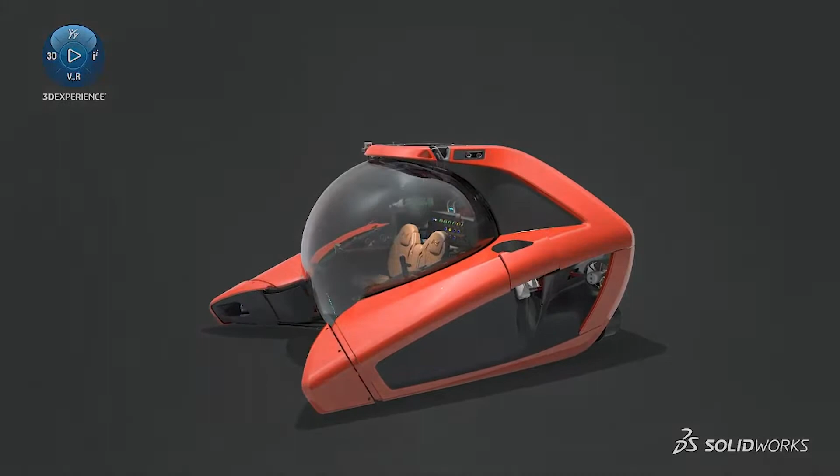At a high level, let's take a look at SOLIDWORKS 2022, on the surface and in a deeper dive. The high-level themes for SOLIDWORKS 2022 are Work Smarter, Work Faster, Work Together.

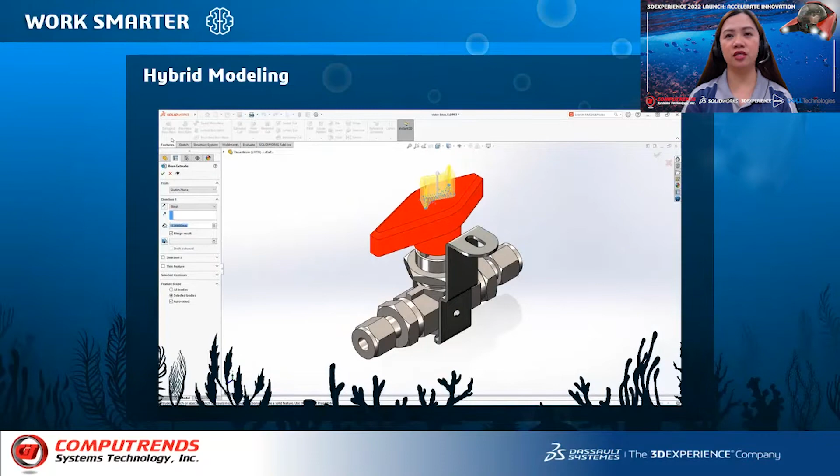Let's start with Work Smarter. We have hybrid modeling, which combines the advantages of mesh data with the accuracy of parametric features to streamline your part design.

Configuration table: generate integrated tables based on existing variations to generate and manage configurations.

Component patterns: pattern-driven placement of assembly components generates seed and instances more intelligently.

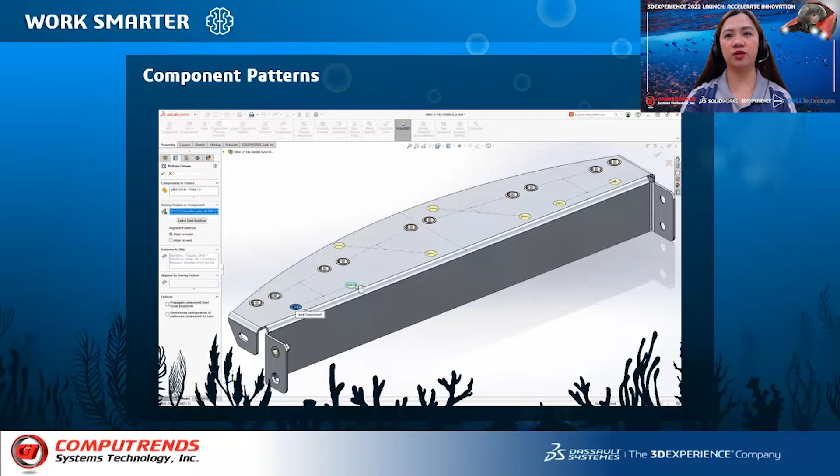Geometric Tolerance UI: a redesigned GD&T experience lets you work faster and more intuitively to define your most complex requirements.

Stud Wizard: generate external threads, including new cosmetic graphics and callout annotation.

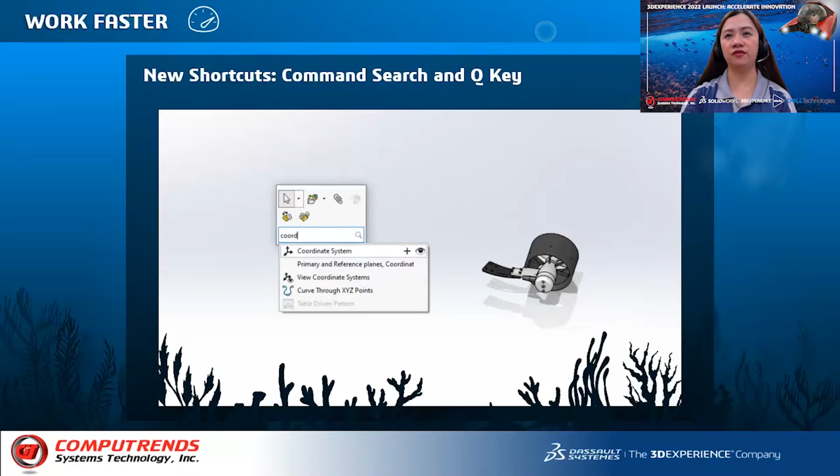Work faster: new shortcuts, Command Search and the Q key. Search is integrated into the S-key shortcut menu, and Q reveals component reference geometry on demand.

Open Detailing Mode Drawing from LDR: jump from an LDR assembly to the associated drawing in detailing mode without resolving any components.

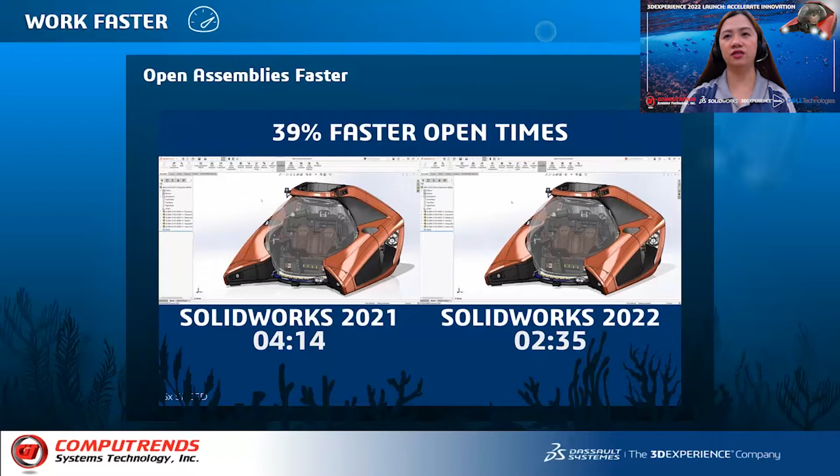Open assemblies faster: dramatically improve performance when opening, closing, and saving, including fully resolved and LDR sub-assemblies.

Quick Mate Toolbar: fast and simple way to build your assemblies and make final adjustments to assembly constraints.

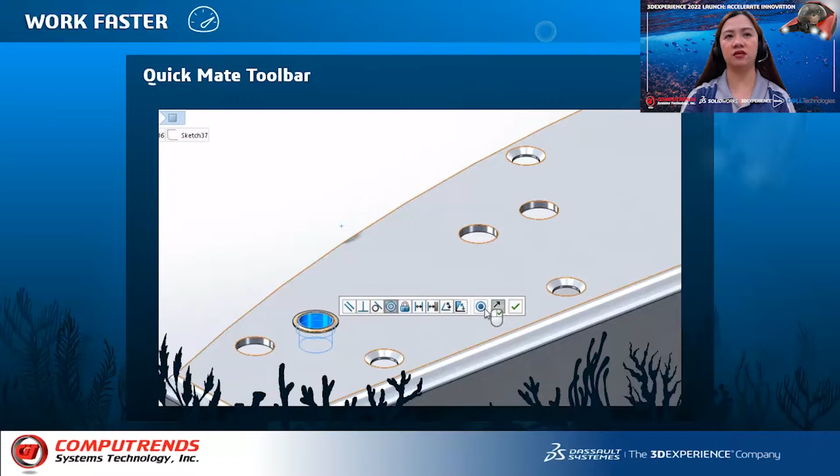Expanded use of detailing mode: add new standard views and hole tables, and open any drawing in detailing mode, regardless of when it was last saved.

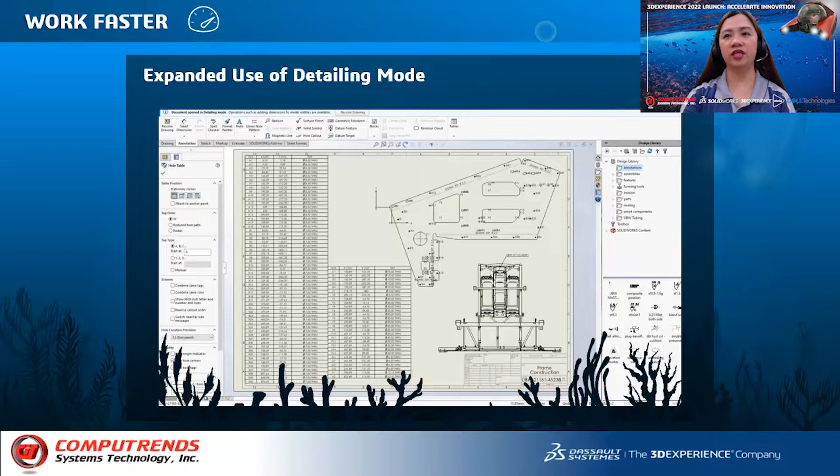Work together: new administrative image types and options. New types allow you to deploy SOLIDWORKS installations remotely, and new options allow for long-awaited client installation.

Now let's see what's in SOLIDWORKS 2022, deeper dive. We have user experience, hybrid modeling, structure systems, assembly performance, assembly features, drawings, import, graphics, and administration.

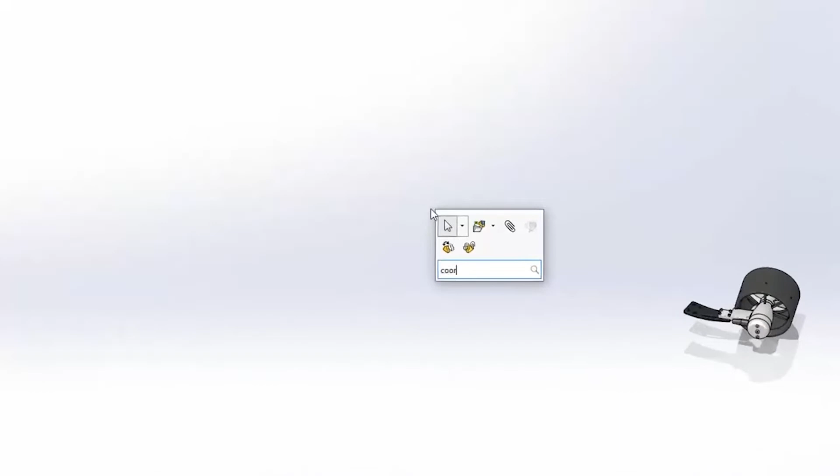User experience: SOLIDWORKS 2022 helps you be more productive with thoughtful user experience enhancements. Command Search is now integrated into the S-key shortcut menu.

You can even have SOLIDWORKS show you its location for future reference. The position and orientation of the thrusters has been precisely calculated, so mating to a coordinate system would be a good strategy. In 2022, coordinate systems can be defined using specific numeric values, making placement of the second thruster a snap.

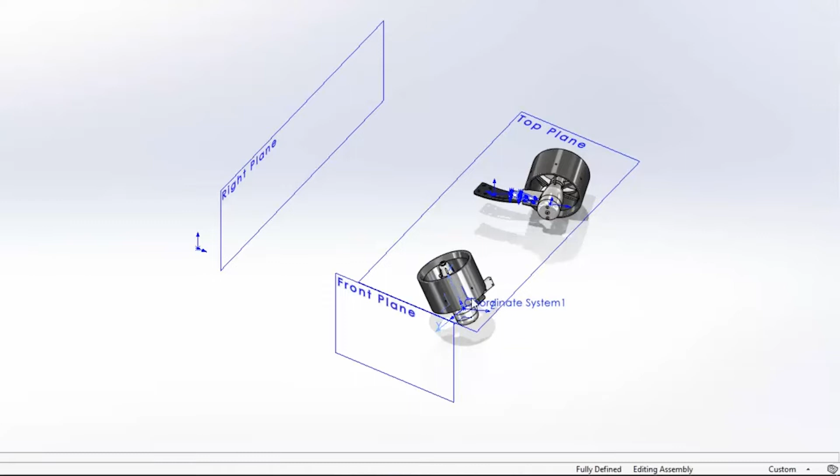Origin visibility is currently turned off to reduce clutter on screen. With 2022, the new Q key keyboard shortcut allows you to quickly turn on assembly or component reference geometry such as planes, coordinate systems, and origins. Coordinate systems have visually and functionally changed as well.

Their axes, planes, and even the point itself can be used to create sketches, section views, and more. These thrusters need to be mirrored. Commonly used tools like these are conveniently added to the shortcut bar with one click, and the new Q key shortcut works even while creating features.

These bubbles appear throughout the system options and give you more insight into the setting. Dismiss messages have always been easy to show again but were sometimes truncated. Now, hovering over an item reveals the whole message, making it easy to determine if you'd like to show it again. Notification pop-ups, like this reminder to save, have been unified in style and appearance.

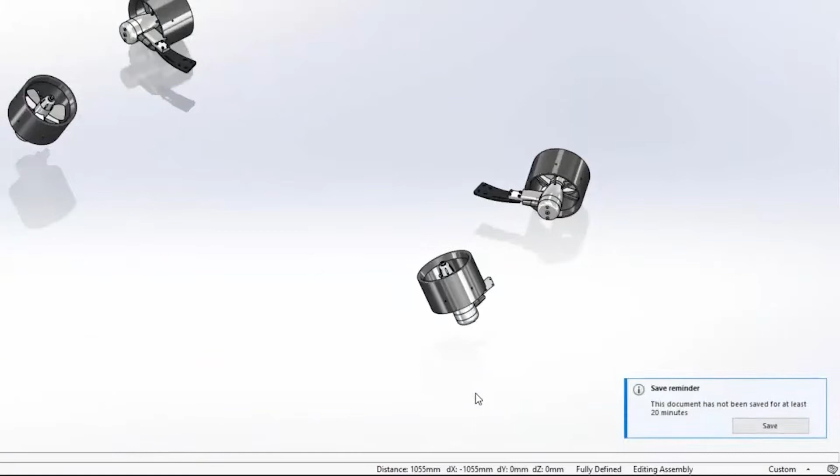When you need to collect a project and all reference components, there's no better tool than Pack and Go. In 2022, you now see a progress bar giving you an indication of how long the process will take, which is especially useful for larger assemblies.

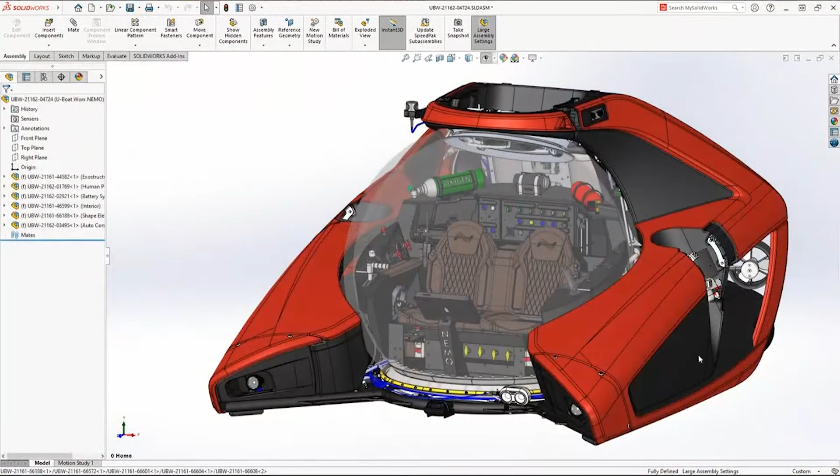The most user-friendly 3D CAD software in the world is now even easier to use with these valuable additions to the user experience: access every command from the S key shortcut menu, and position and orientation can now be defined numerically.

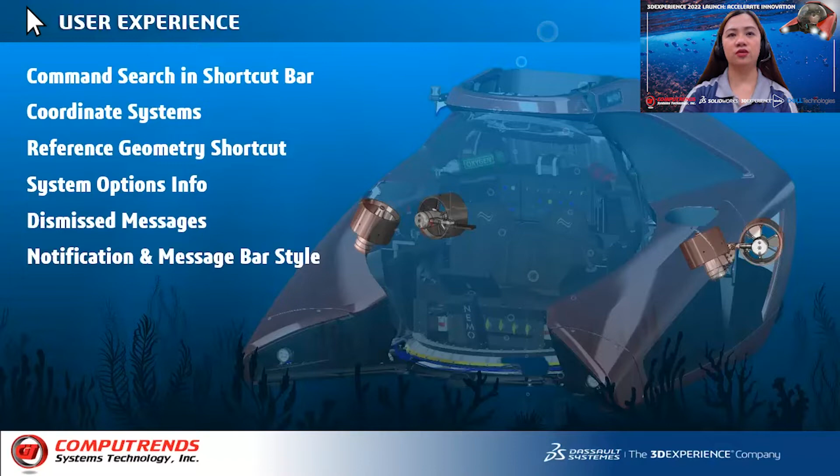The Q key shows planes, origins, and coordinate systems. Get more information when you hover over the eye bubble icon, and read the full truncated message. Notification style has been unified, and new informative message bars are introduced, so you'll no longer wonder if Pack and Go is processing or stalled.

Hybrid modeling: designers demand the ability to create manufacturable products using an ever-increasing variety of file formats.

SOLIDWORKS 2022 makes this easier than ever with new enhancements for Mesh BREP formats and tools that help you view and edit critical product information. This ball valve equipped with the lockout tagout feature is perfect for this control panel, but the handle is too plain to be incorporated in a luxury product like the Nemo.

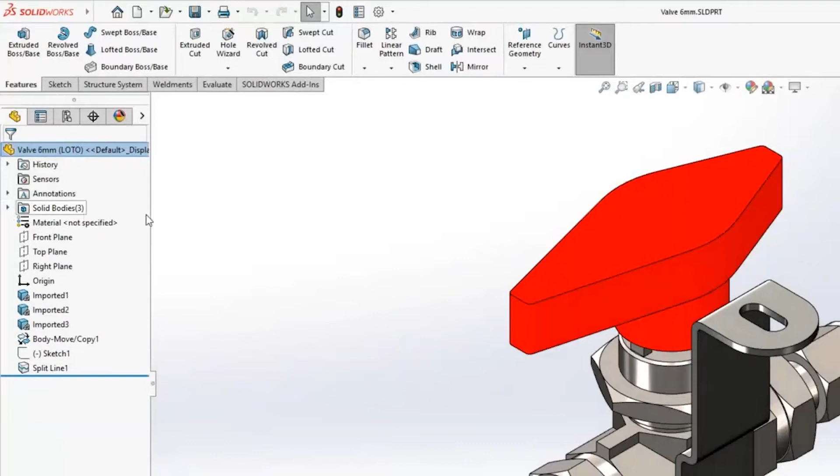The supplier provided their files in Mesh BREP format. In SOLIDWORKS 2022, working with these files is just like working with native geometry, thanks to the new hybrid modeling capabilities. The handle needs a slot for a lock.

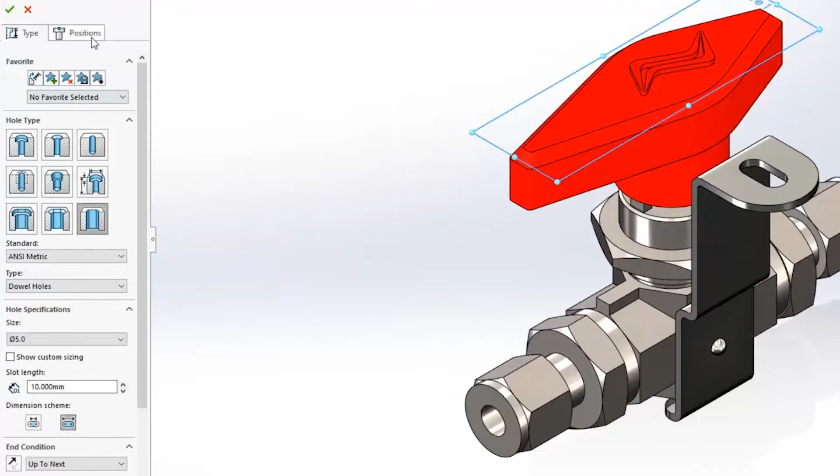Now in 2022, Hole Wizard's slot length can be defined by arc tangent or centers. Also, when positioning the slot, the tab key toggles between vertical and horizontal orientation.

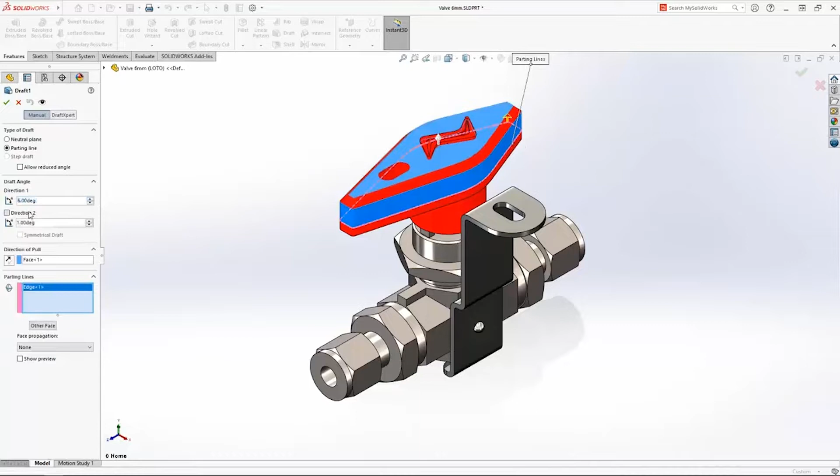Manufacturing this handle will require draft. Bidirectional parting line draft would be the most appealing. In SOLIDWORKS 2022, you can now create draft in both directions when using a parting line rather than having to create two separate draft features.

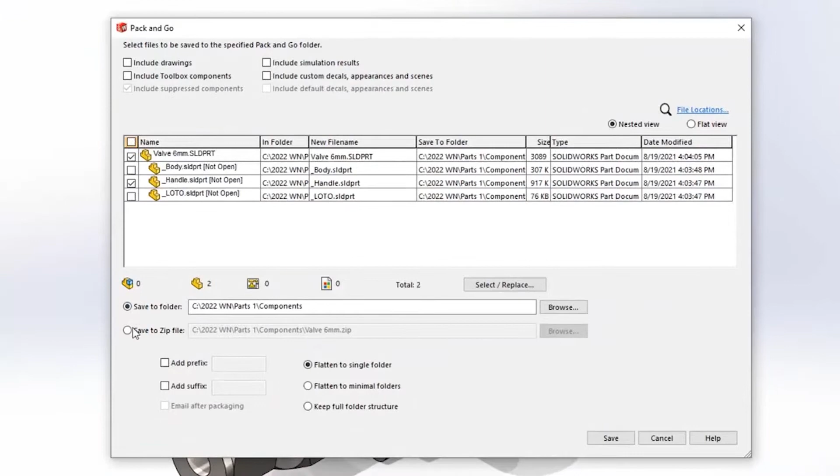This mesh file contains three bodies, but the manufacturer needs access to the individual components. Now in SOLIDWORKS 2022, Pack and Go recognizes the references created when using the save bodies and split part commands. This way, you can choose which files you need without having to find them manually in Windows Explorer.

Section views are a great way to inspect components, but sometimes a suitable plane doesn't exist. Now, you can specify a section view from any cylindrical face, conical face, or axis.

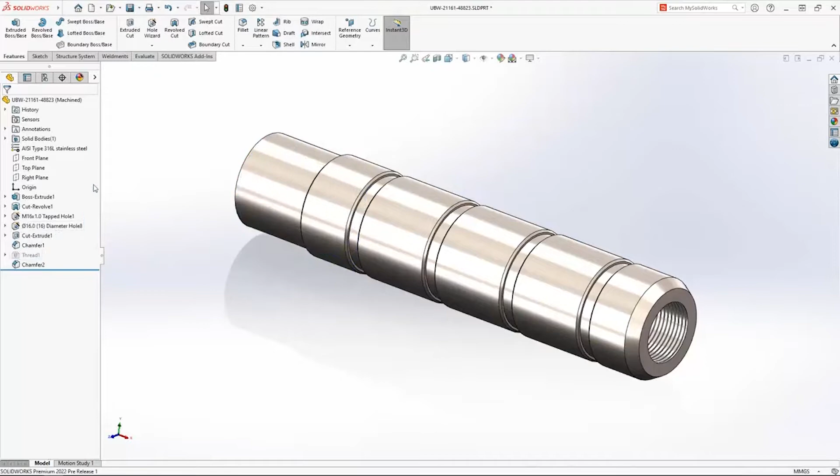These 16mm cut threads are useful for rapid prototyping. The new Stud Wizard is a great choice here as it automatically recognizes the diameter of the boss but still provides a list of different thread sizes and pitches to use. You can even create an undercut with full control over the dimensions.

In SOLIDWORKS 2022, configuration-specific properties have been separated into two tabs: Configuration Properties and Property Summary. In the first tab, property information is added. Now you can choose which configuration they applied to using the drop-down. The Property Summary tab provides a useful way to compare configurations based on a custom property.

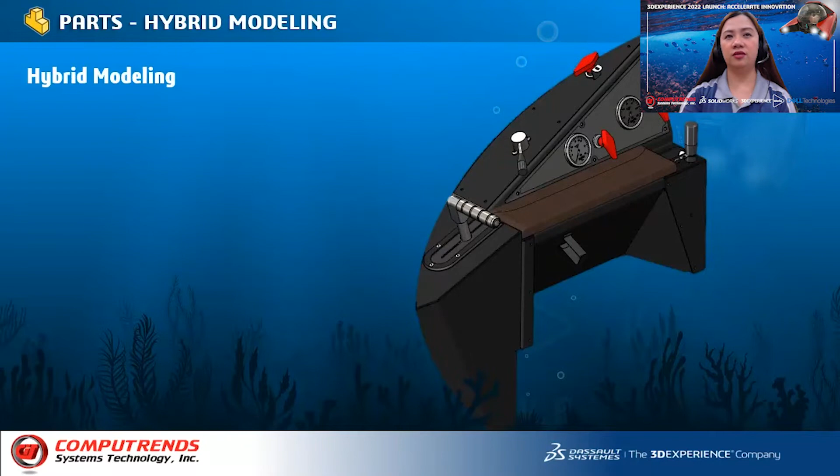Designers sometimes have no choice of the files they receive from a supplier, but still need to support the design through to several different manufacturing methods. SOLIDWORKS 2022 provides the tools you need to get the job done fast and efficiently while providing improved visibility to critical product information. Directly edit Mesh BREP bodies just like you would a native SOLIDWORKS part.

Slot length can now be defined using arc centers or arc tangents. The tab key toggles orientation. Add draft in two directions when using a parting line. Pack and Go now recognizes the resultant bodies from the split part and save bodies commands. Easily section about an axis. Create a stud from an existing cylindrical boss or make one on the fly. It's easier than ever to add and edit properties.

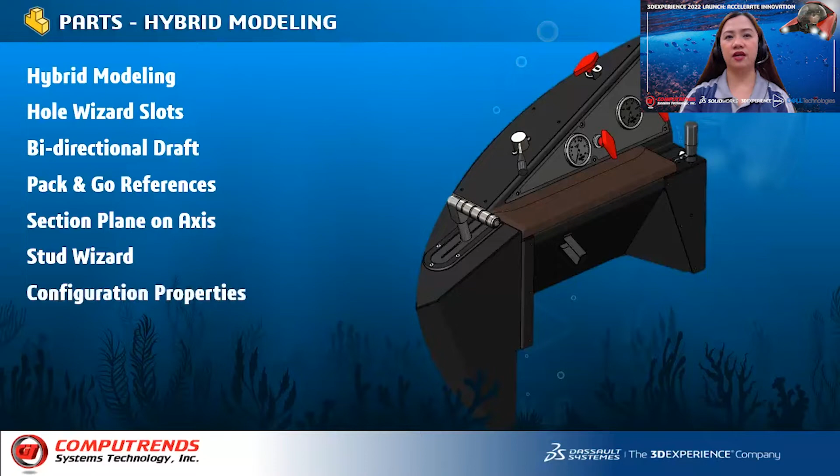Structure systems. 2022 is no exception, with enhancements to secondary members, the introduction of connection elements, and more. This vertical post will be carrying a heavy compressive and bending load, so it will need extra support.

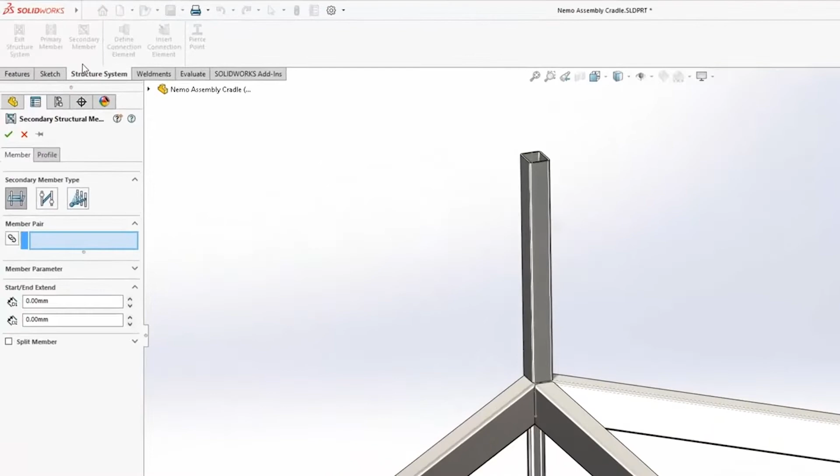Creating multiple secondary members is fast in SOLIDWORKS 2022, now that you can select a point and multiple bodies. Corner treatments are just as intuitive to define as they have been in the past, giving you full control over the end result. Also new to SOLIDWORKS this year is the ability to define or insert connection elements.

This leg requires a base plate so the cradle can be attached to the floor. Just select the member and the plate is automatically centered at the end.

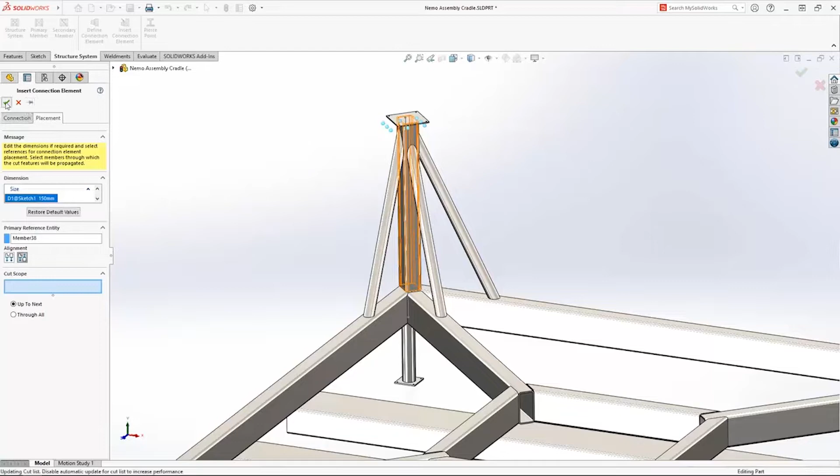These forklift lifting channels may need to be replaced if damaged, so a connection element is perfect for this situation. Simply select the faces of the members, then use the convenient member planes, which reveal themselves automatically, to center the element. Gussets and end caps are also now supported for structural members in SOLIDWORKS 2022.

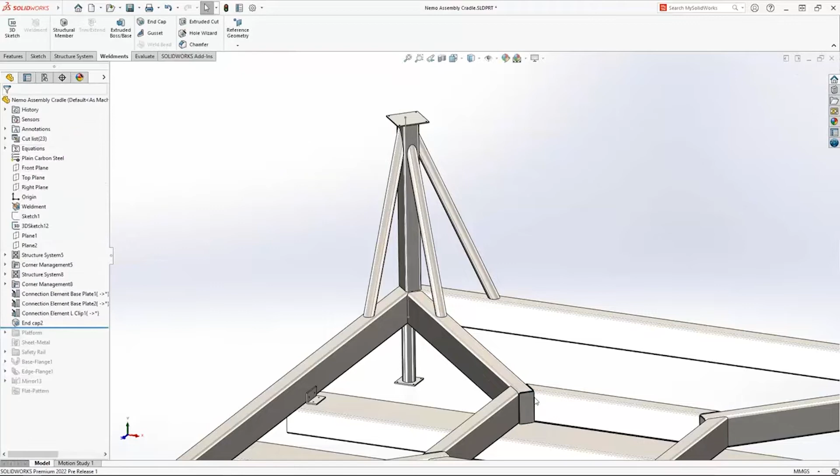Mirroring features and components is a very commonly used function. In SOLIDWORKS 2022, you can mirror across two planes or faces. No longer will operations like this require two separate mirror features.

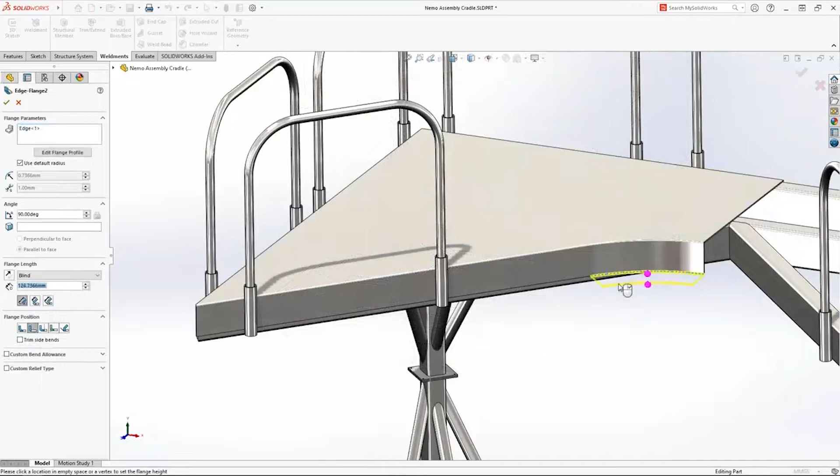SOLIDWORKS introduced the ability to create an edge flange on the circular edge of a non-planar base in 2021. This has been improved to allow you to edit the flange profile directly inside the property manager so that you can specify the exact flange length you want. Structure Systems is a powerful but flexible tool.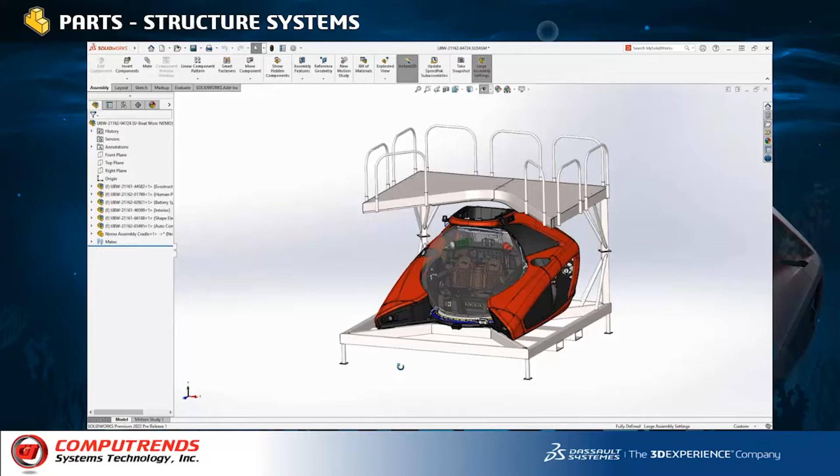With these new enhancements to secondary members, connection elements, mirroring, and sheet metal, creating frames and structures is easier than ever. Quickly create multiple secondary structural members from a point, and define and insert components used to bolt members together.

No longer just for weldments, mirroring is now supported in structural members, reducing the number of mirror features in your part. You can also edit profiles for flanges created with the circular edge of a non-planar base.

Assembly performance: SOLIDWORKS 2022 offers faster ways to access your design from the start. Large Design Review Mode, introduced in a previous release, provides a lightning fast way to open your large assemblies with very few limitations. The large and complex 6031 component Nemo submersible from U-Boat Works opens in merely 13 seconds, allowing you to get to work faster.

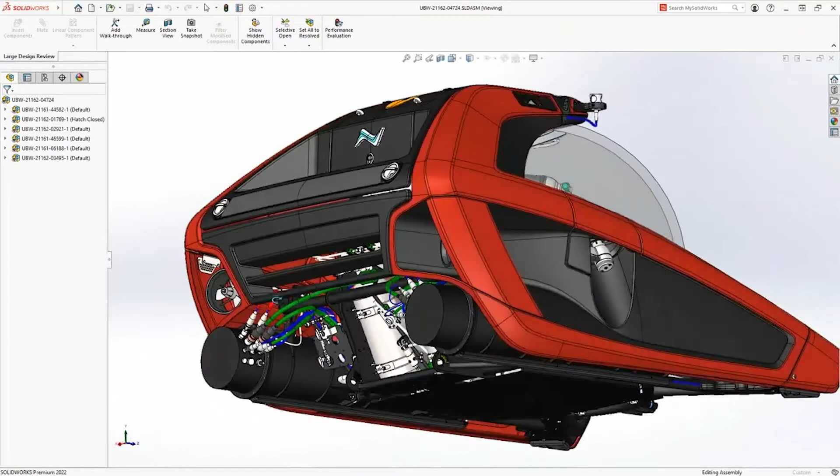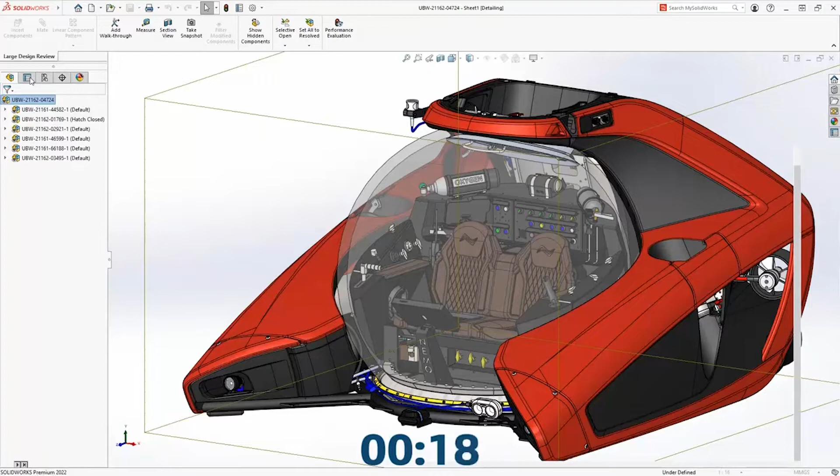New for 2022 is the ability to easily open drawings from a large design review assembly in detailing mode from the right mouse menu. Detailing mode is an extremely efficient way to both open and work on your existing drawing documents. Like opening the large assembly of the Nemo, the drawing is opened rather quickly as well, in only 18 seconds. Detailing mode is a fully interactive way to work with large drawings that have already had their views created.

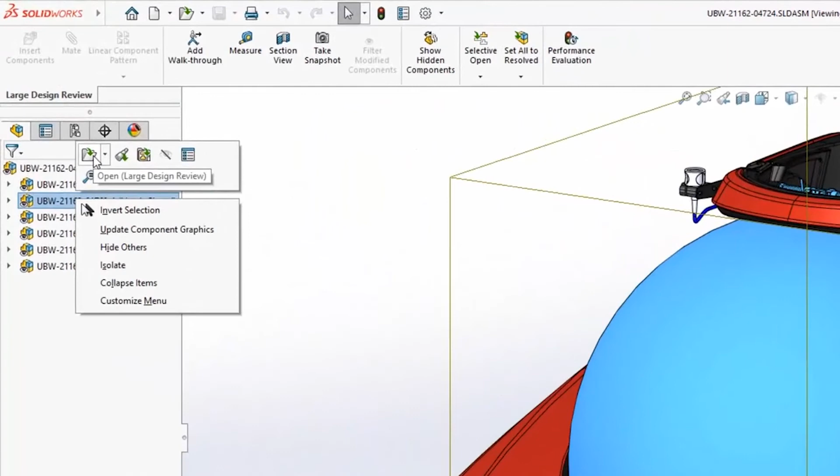In this environment, you can continue detailing your design, adding dimensions, notes, tables, and more. The ability to quickly access drawings from large design review mode will streamline how you work with large complex designs. Additionally, in 2022, you can open sub-assemblies from large design review mode in this lightweight format as well.

This ensures that you're not loading any unnecessary information that's not currently needed. Whenever you want access to the fully resolved models, you can choose to open them from the same right mouse menu. Assemblies can now be opened fully resolved faster than previous releases. When working with large design review mode, you can now open the corresponding drawing in detailing mode and any sub-assemblies in LDR.

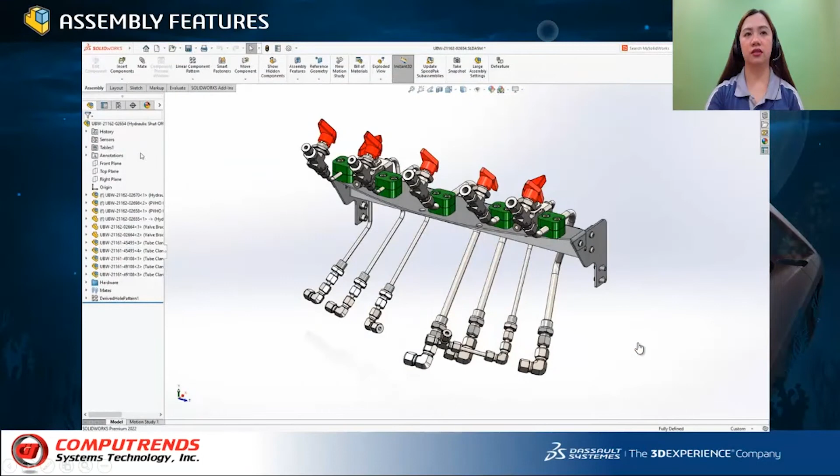Assembly features: you can always resolve an assembly that is already open in large design review mode.

Moving components is now easier in SOLIDWORKS 2022. When selected from the Feature Manager tree, you're now presented with a triad that makes it extremely simple to get a component into just the correct spot, with controls for X, Y, Z, and rotation all at your fingertips.

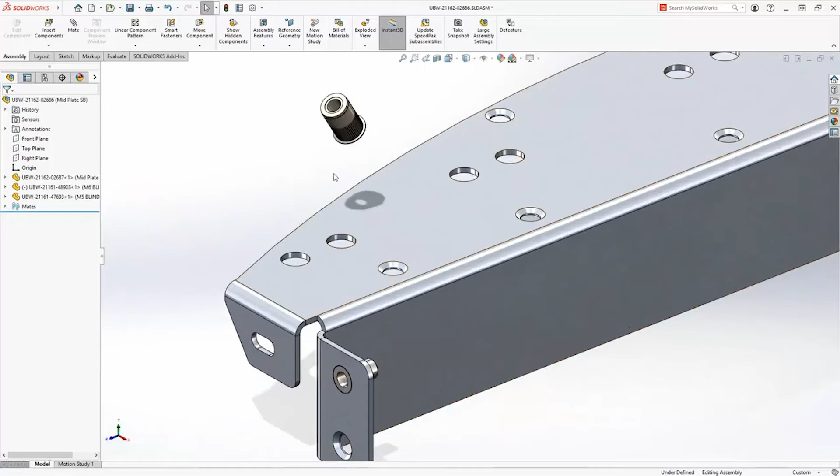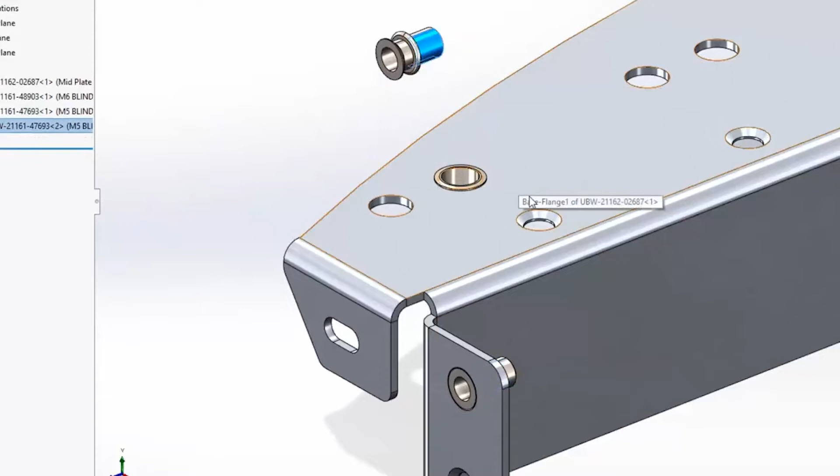The Quick Mates toolbar in 2022 also gives you more control by presenting you with the option to make adjustments before adding a mate, such as the alignment. This is also true when adding circular type mates, where you will be given the opportunity to lock the rotation of them before confirming. This new ability to add extra control while mating with the Quick Mates toolbar makes it fast and simple to quickly build your assemblies.

The intelligent pattern-driven component patterns get even smarter in SOLIDWORKS 2022. When you choose a component to pattern, SOLIDWORKS will always choose that component's location as the seed for determining how to create and position the other instances.

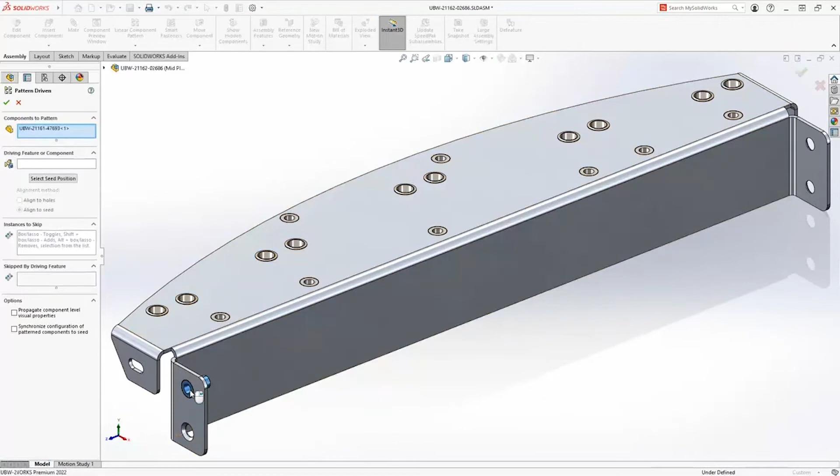Even if you change the location of the component to a different location, the pattern still assumes that the component you are patterning is in the seed position. This means it's much easier to take advantage of the existing patterns and hole wizard features to quickly position multiple instances of components such as hardware and rapidly populate your assemblies.

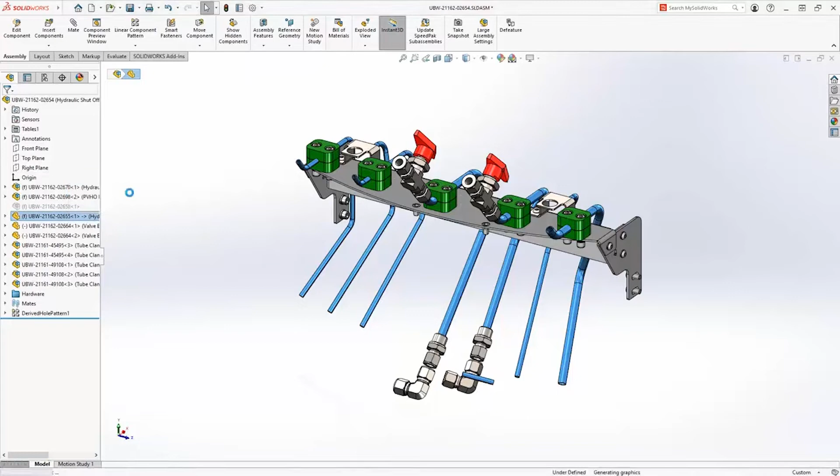Configurations are a powerful way to create alternate versions of parts and assemblies all within a single document. You can choose to have instances of components included or excluded from different versions of the design. You can also choose to use alternate configurations of other components in each configuration. These possibilities are endless. New for SOLIDWORKS 2022 is the new configuration table.

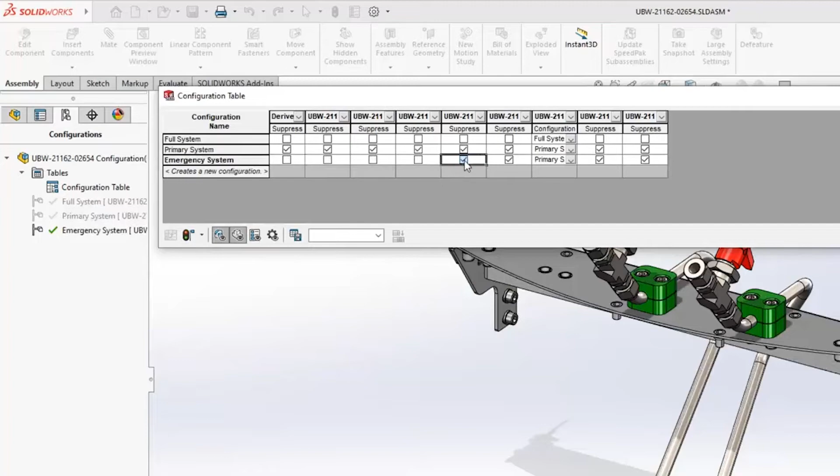This table makes it much easier to both create and manage configurations. From the table, you can add new versions to your design, and you can also choose to toggle the suppression state of different components on and off. You can specify which version of components to use in each configuration.

The controls make it easy to see your changes as you're working as well. If you make changes to the configuration manually, such as suppressing components that weren't included before, they will be added to the table as well.

The configuration table also has filters to make it easier to focus on what's important. You may want to ensure that the custom properties for each configuration are unique to each new version of the assembly.

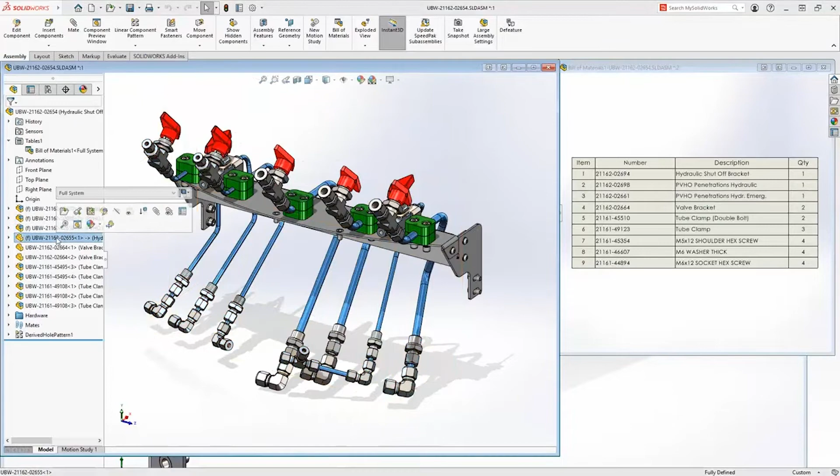When looking at the bill of materials, there will be cases when components in the design should not be included. This option can be controlled from the component properties in the assembly to specify this. However, this can become time-consuming for parts that regularly should not be included.

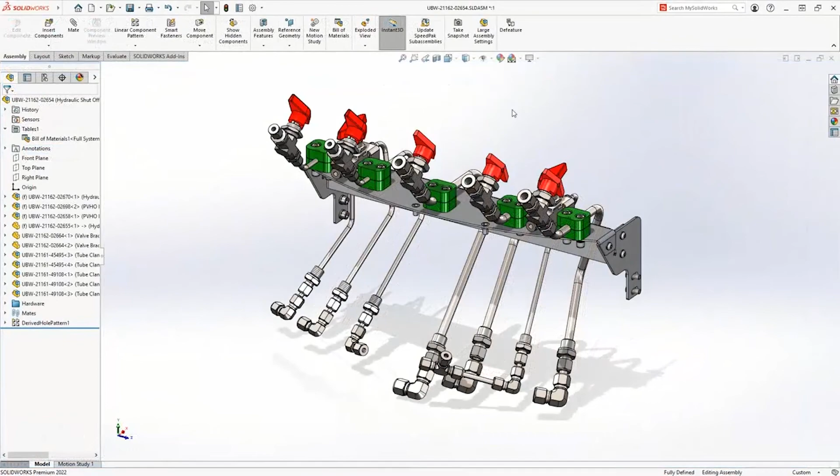New for SOLIDWORKS 2022 is a configuration option at the component level where you can specify that a component should have this option enabled by default, saving you the time from having to change this each time the component is used. SOLIDWORKS 2022 introduces a wide variety of performance and usability improvements to ensure that you can focus on the engineering of your designs and less time determining how to manipulate them.

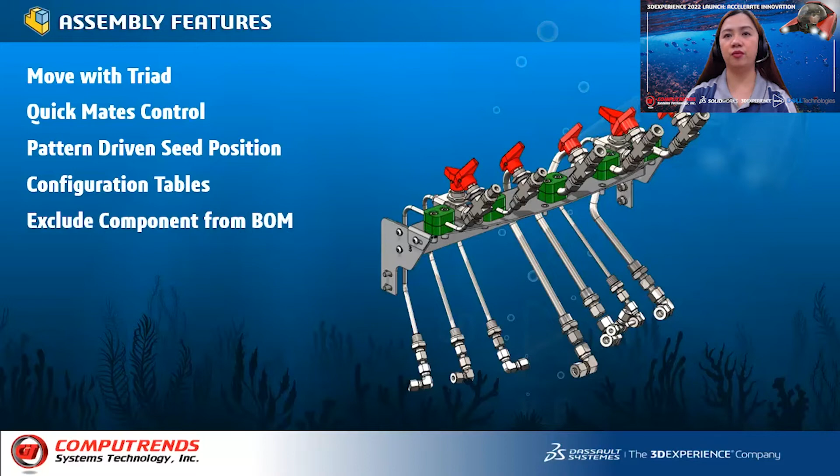Selecting a component now presents a triad for easier movement in the graphics area. Quick Mates now gives the option to flip alignment and lock rotation before finishing. It automatically determines the seed instance of a pattern-driven pattern. There's a new native table type for creating and managing configurations that does not require Microsoft Excel, and a new configuration setting that specifies if a component should be excluded from the bill of materials by default.

Drawings. Companies like UBoltWorks need to build it right the first time. That means clearly communicating through SOLIDWORKS drawings. And sometimes these files get huge.

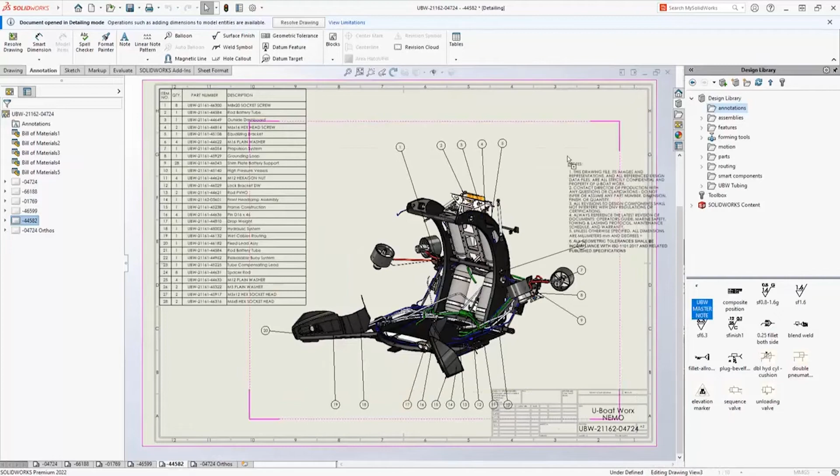You can open even your largest prints in just seconds and work on them without the overhead of loading any parts or assemblies, or even having them on your machine. Add and edit notes, snap in a missing balloon, organize sheets, add dimensions, set tolerances.

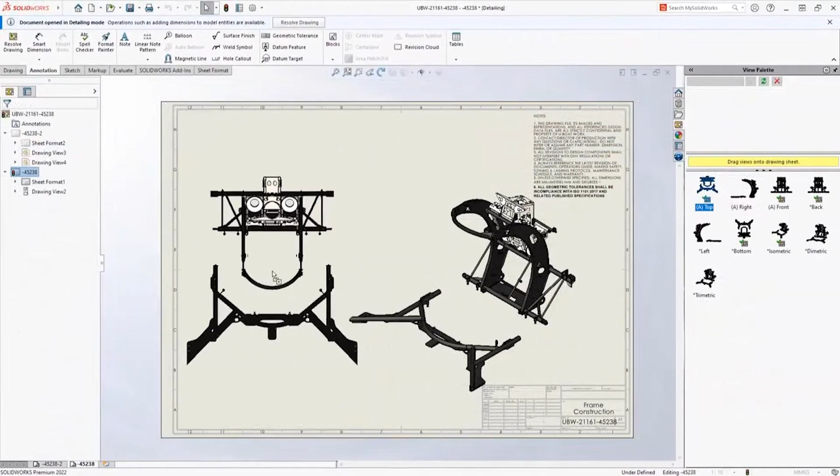New in 2022, you can insert whole tables and standard views from the view palette. When you're done, you can save, even print in a completely accurate PDF.

What about older drawings that haven't been accessed in years? In 2022, SOLIDWORKS has extended the ability to open any prior version drawing right to detailing mode.

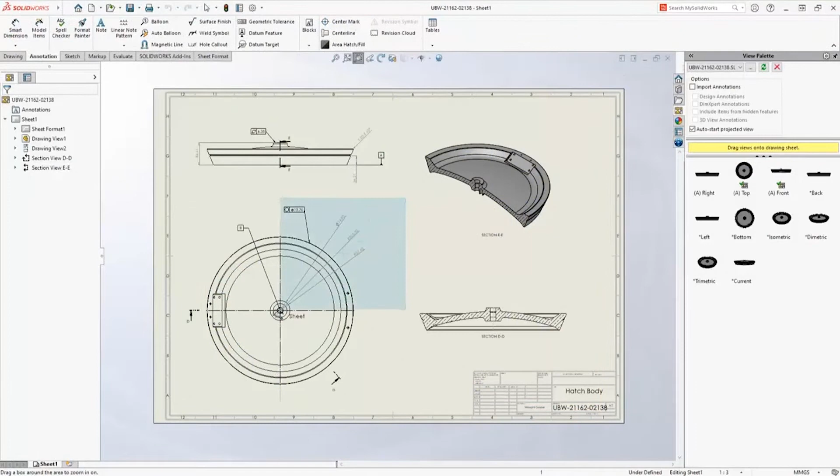So what else is new with drawings? How about a new in-context menu? This pop-up lets you toggle a circular dimension, diameter, radius, or linear.

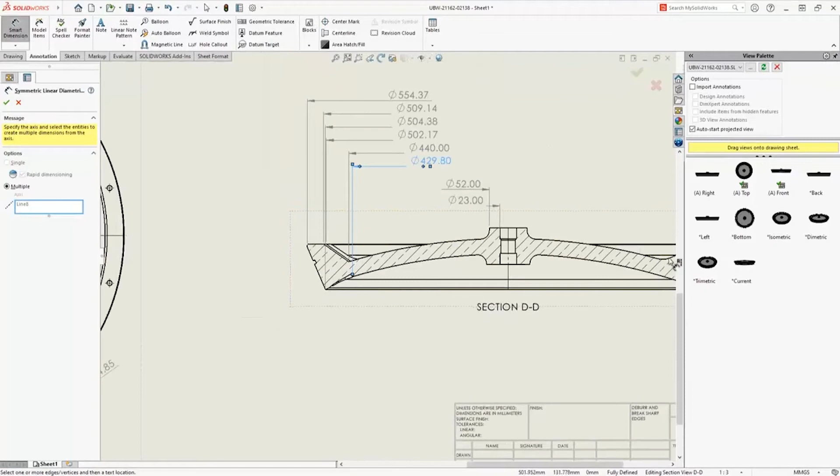For turn parts, the new symmetric linear diameter dimension will come in handy. These are double dimensions which can apply in a single click to a silhouette edge or in batch with multiple axis mode. This new annotation type allows for a clean section view by eliminating redundant leader lines.

Geometric dimensioning and tolerancing allows functional definition of component features and allowances, so it can clearly illustrate manufacturing intent. SOLIDWORKS 2022 introduces a brand new interface to define geometric tolerance indicators.

In a design like this, I have many unique weldment parts, each with its own cut list. This is rich data. With SOLIDWORKS 2022, the detailed cut list option is available for bill of materials of all types. This means you can aggregate multiple cut lists into an assembly BOM.

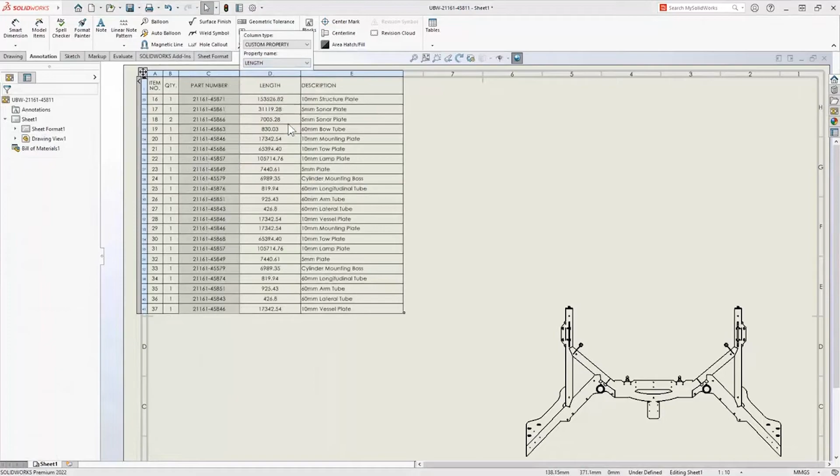New in 2022, the flat pattern view is available, and there's a new option to toggle bend lines visibility, increasing your ability to automate documentation of sheet metal parts.

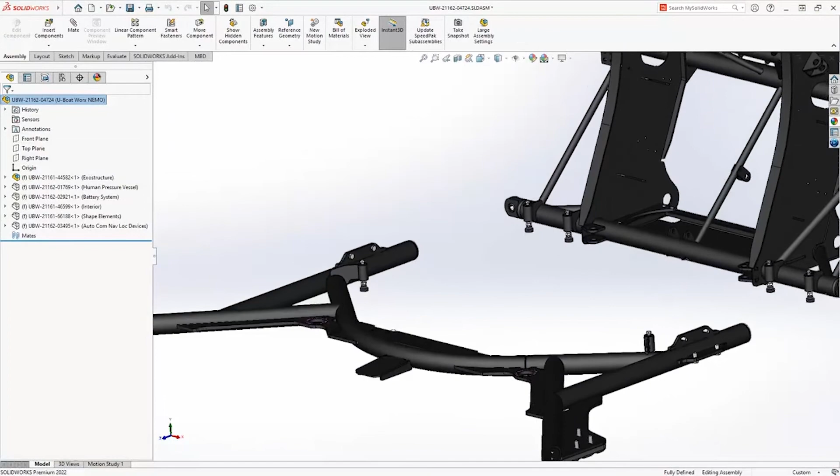Proper documentation is a key component of bringing your designs to life. Add clarity to your drawings, share your content, and finish this task faster with SOLIDWORKS 2022.

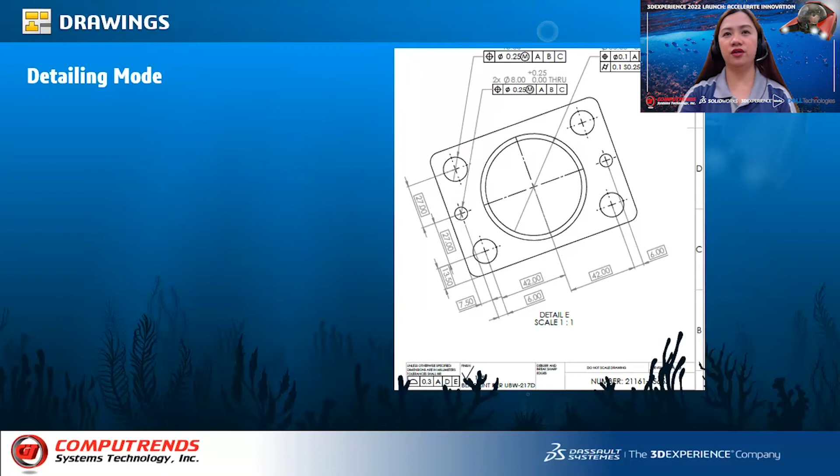Add standard views, hole tables, and work faster by opening any year's drawings too. Flip between radius, diameter, linear within context. Use the tab key to choose before you place. The new dimension type gives cleaner views of complex turn part diameters.

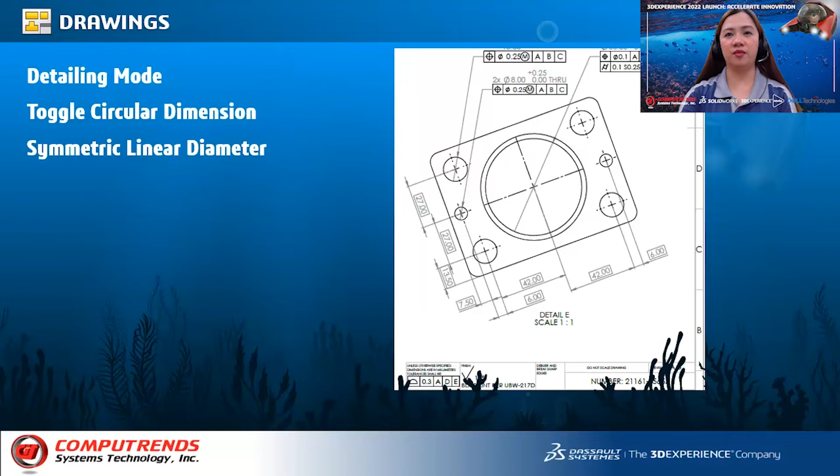A brand new, easier to use toolset to document GD&T indicators in the latest industry standards. Flexibility to promote and show weldments cut list in any type of assembly bill of materials. Automate creation of sheet metal flat pattern and trimetric or dimetric views.

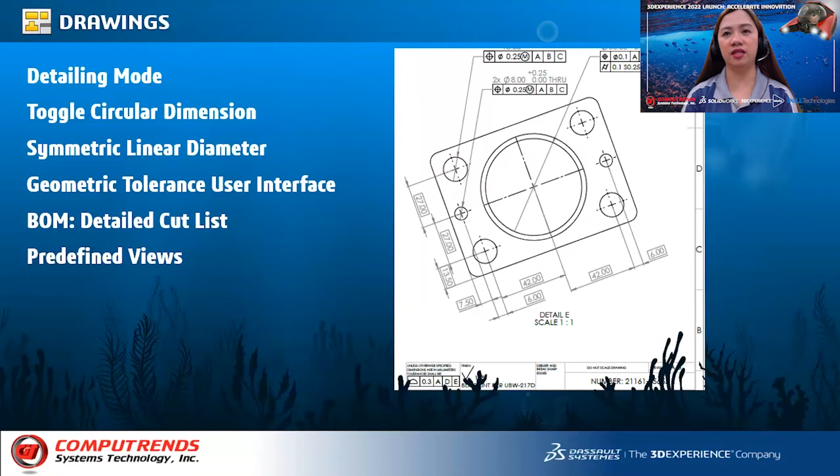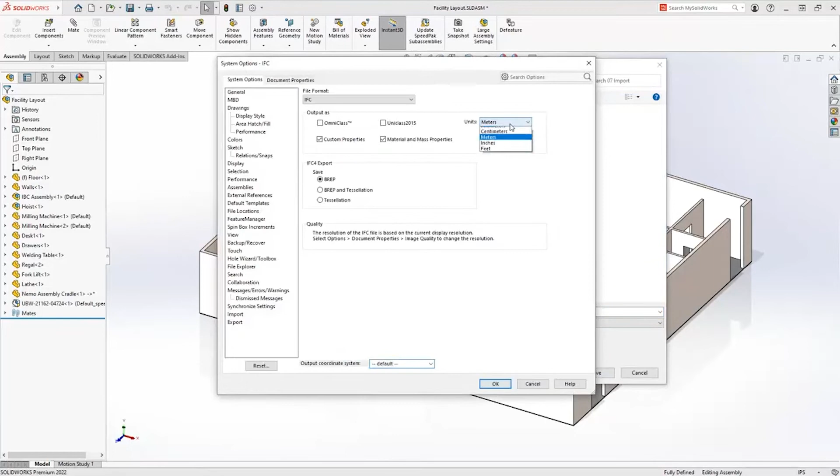Import. When collaborating with others performing design work focused on facilities, often you need to share your design data using alternate file formats like IFC. SOLIDWORKS 2022 has focused on improving both the efficiency and reliability of saving IFC file formats out for other design tools to leverage. Additionally, 2022 has improved its flexibility when reading IFC files as well.

Now, when you open an IFC file, you can choose to filter specific object types to import, avoiding the need to open unnecessary geometry, and focus on just the information you need to work with. All of this means the imported files both open faster but also do not contain overly complex geometry for the specific design task you need to perform when working with IFC data.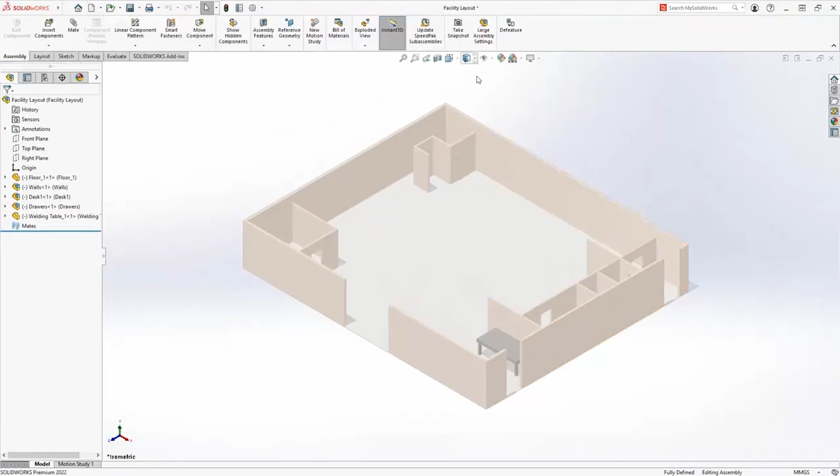Also new for SOLIDWORKS 2022 is the ability to better support the export of the DXF and DWG file formats from part files.

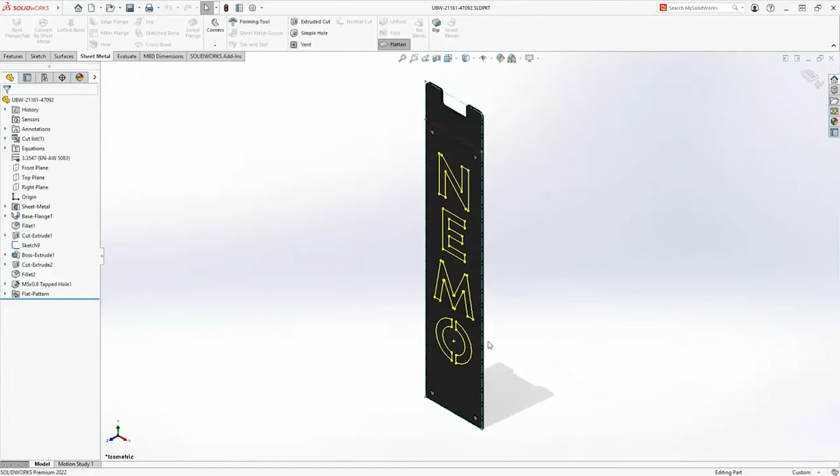Components often contain color information that is important for manufacturing processes, such as the color of sketches, bend lines, and other information. This is extremely valuable for downstream operations where colors can represent different manufacturing processes or parameters for NC tool equipment. SOLIDWORKS 2022 has improved the way you can collaborate with others by improving the overall import and export experience to various file formats.

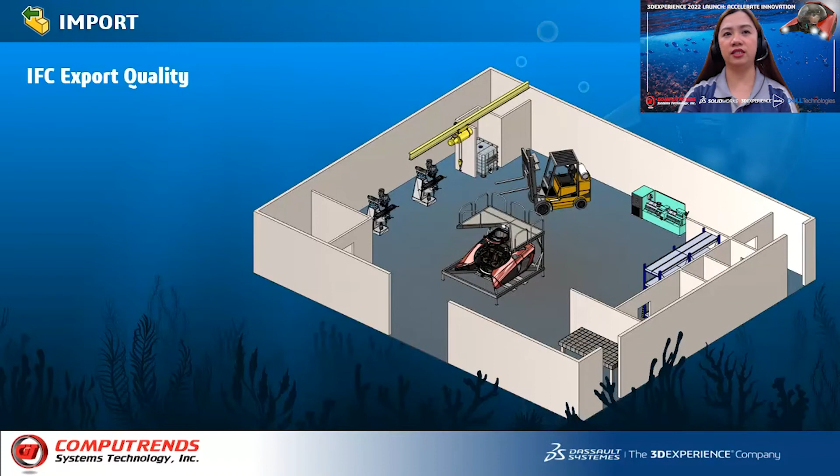IFC files exported from SOLIDWORKS have higher quality. You can now filter and choose which objects to import with IFC files. Support colors for DXF or DWG files created from part files. Import thousands of surfaces or solid bodies without long delays.

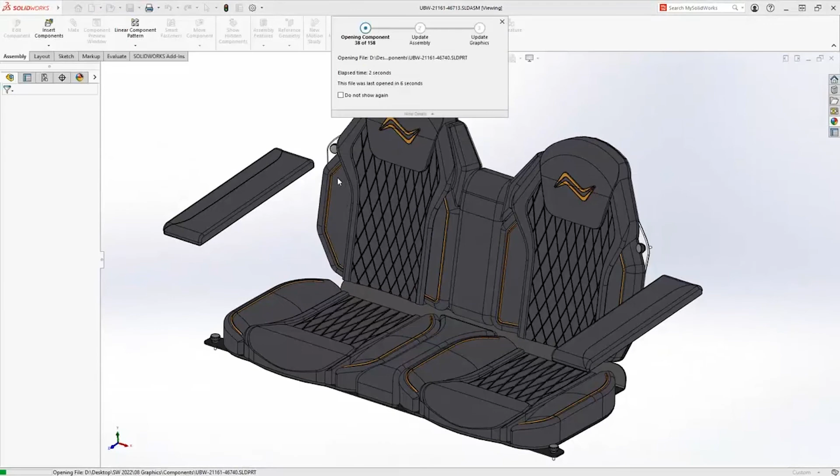Graphics. Cosmetic and appearance changes happen regularly throughout the design process. Understanding and updating these changes should happen regardless of when or how you open your files. SOLIDWORKS 2022 now automatically resolves lightweight components that have had graphical or appearance changes, regardless of whether any features have changed since the components were last saved. This ensures that your components will always appear correctly.

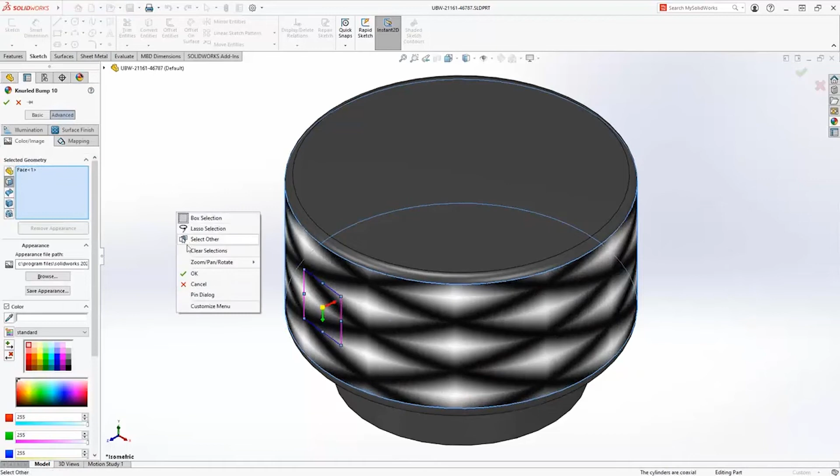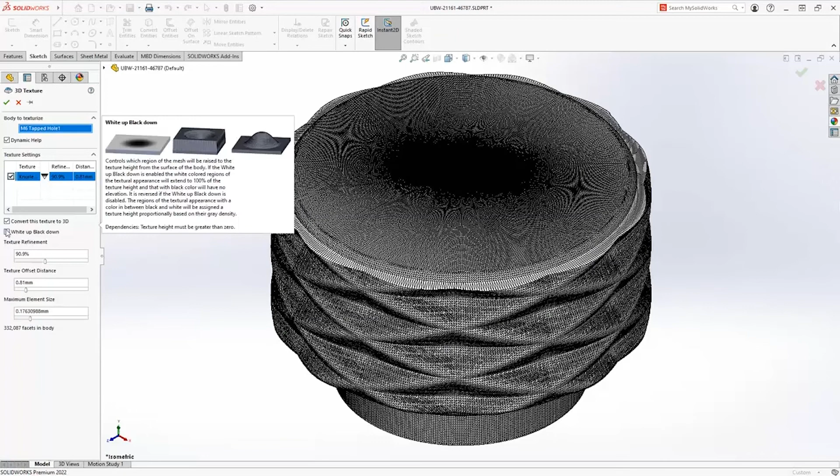SOLIDWORKS introduced a unique and simplified way to incorporate complex textures within your design in a previous release. By leveraging unique appearances on faces, bodies, or components, textures can be created on these surfaces to generate complex geometry quickly. SOLIDWORKS 2022 delivers increased performance and responsiveness when creating these oftentimes complex and highly detailed textures, meaning you can use them in more places without sacrificing performance.

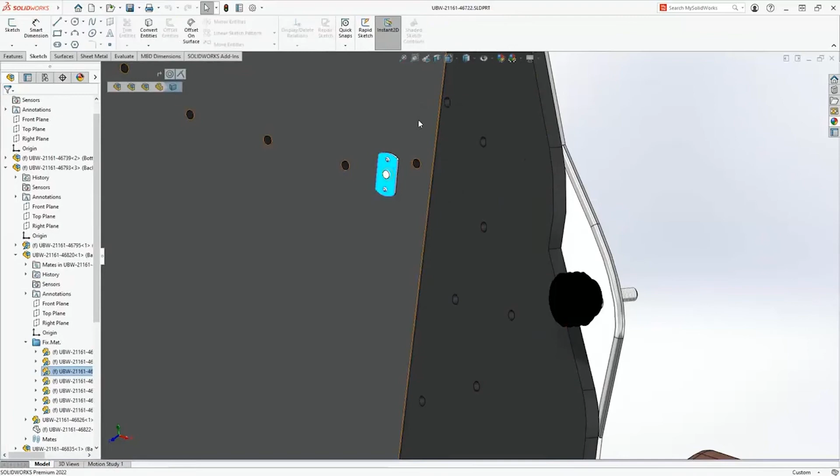Another graphical change in SOLIDWORKS 2022 is the introduction of texture-based cosmetic threads. These new cosmetic threads, beyond looking great, make it much clearer to understand which components have threads on them. These threads will be used for any type of feature that includes cosmetic threads as well, from manually created threads to the newly added stud feature and of course the hole wizard.

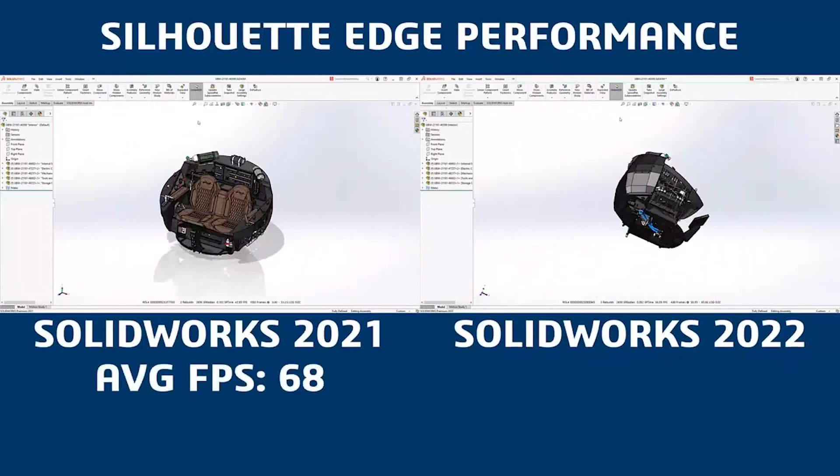Finally, performance is always critical to saving you time. SOLIDWORKS 2022 has increased the frame rate when rotating parts and assemblies with silhouette edges by over 10%, saving you time with every single zoom, pan, and rotate.

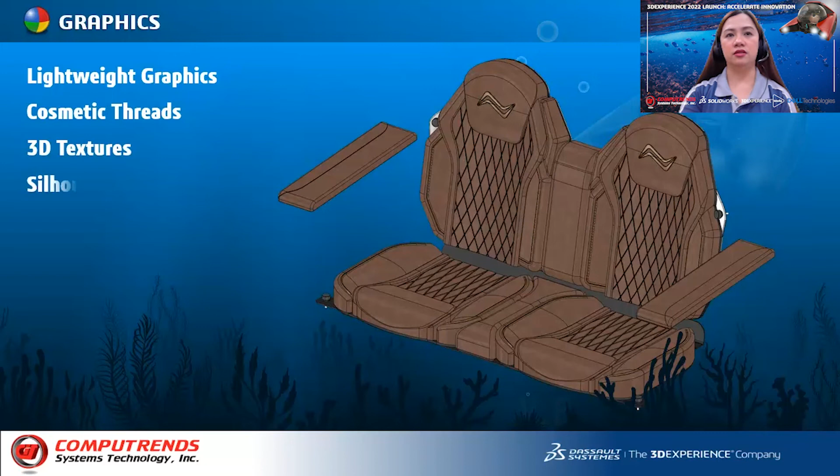Correct graphics and textures are shown for components that are loaded lightweight. Graphics have been completely redesigned for clarity and performance. Faster and more refined with better detail. No longer CPU dependent, increasing overall FPS by 40% when working with assemblies.

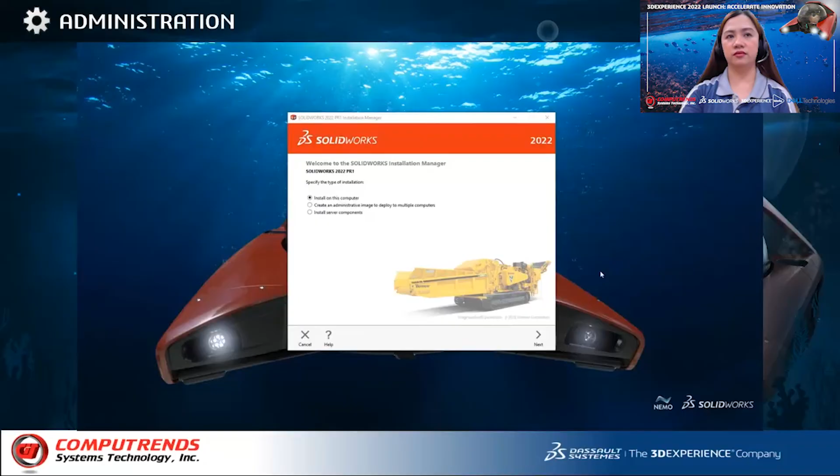And last is the administration. Administrative images create tailor-made installation packages from the source SOLIDWORKS installation files. SOLIDWORKS 2022 brings exciting new enhancements to this process that make deployment more powerful, flexible, and organized.

SOLIDWORKS 2022 offers two new options for deploying administrative images: Remote Client and Compressed. The Remote Client administrative image type was created specifically for remote users. The compressed administrative image contains all of the same components of the standard image.

Staying organized is key to a successful deployment scheme. SOLIDWORKS 2022 allows you to create multiple nested groups that reflect your company's preferred hierarchy. Drag and drop makes rearranging items easy and convenient.

Most users won't need these packages to be installed, so we uncheck them in the global settings. However, some users will need access to the SOLIDWORKS PDM client. Now, in SOLIDWORKS 2022, we can even create a vault view after installation.

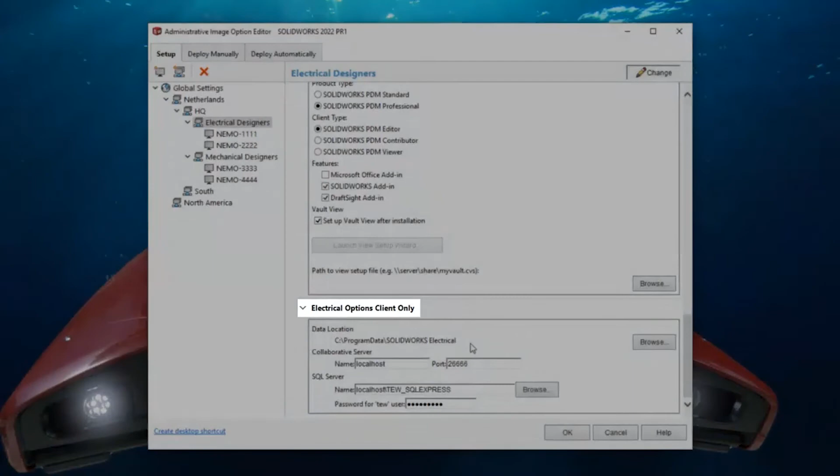The electrical engineers will need the SOLIDWORKS electrical client installed. Because of the nested structure of the options editor, this is done by checking a single box for the whole group. Now, in SOLIDWORKS 2022, the user interface gives a clearer indication of what electrical products will be installed. These tabs reflect the nested structure of the setup tab, making it convenient to deploy to the correct users or groups.

SOLIDWORKS 2022 makes creating, editing, and deploying administrative images easy and powerful, with better end-to-end support for software packages, improved organizational tools, and flexible new image types.

Two new administrative image types give you more flexible deployment. Multiple nested groups reflect your company's organizational structure. Automatically set up the SOLIDWORKS PDM vault view after installation. This makes it clear what's being installed and removes non-relevant fields.

SOLIDWORKS 2022 features many enhancements to help you work smarter, work faster, and work together. We have focused on quality and robustness so your tools are more reliable than ever, and of course, many new features you won't want to live without. You take what you already know and love with SOLIDWORKS and supercharge it with all of the Dassault Systemes' best technology, so you work smarter, work faster, work together.